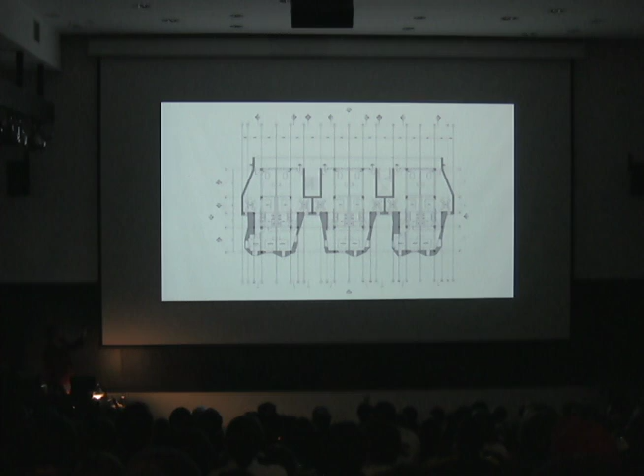What happens in this project is we rationalize this variation in a very particular way. So here in the plans you can see a typical floor level where 6 of these units vary. There's some 2-bedroom units, some 1-bedroom units. These are the kind of floor-by-floor variations. And we rationalize these plates now, the floor plates, where there are these super components, as we call them, very large-scale factory-built elements.

These are the components. You can see in the top and bottom, half components, the only variations in them. And when you assemble them all up, you get an effect like this in the drawing, which in the drawing was great. We then did renderings where it started to go very Flintstone in the sense of these deep punched openings through a solid, worse, and built a model to check. It was, yeah, bad.

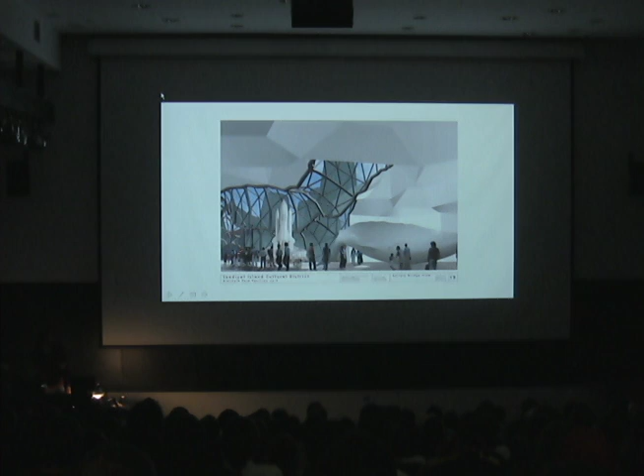And here you can see the way those solar chimneys work. So there are long glass-covered ramps that run along the water and are open on one side. So they'll pull some of the evaporatively cooled water off this walkway. And then these are the chimneys that'll get super hot, like 150, 180 degrees in the summertime. And these will suck all the cool air from the water through the building and up out the top of the building.

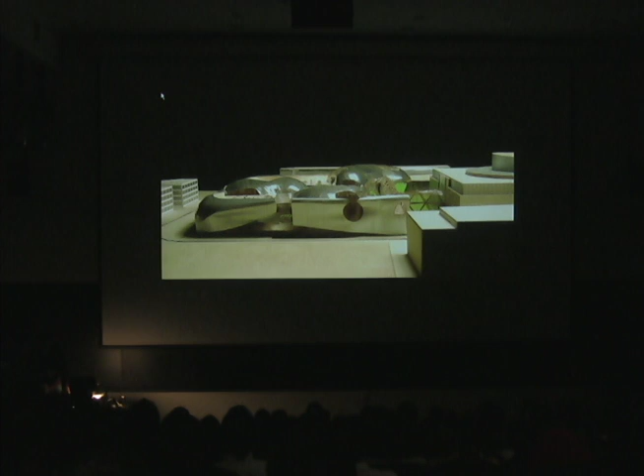And you can see also the transition from these facets, getting more and more faceted until they hit these oculi, and the multiple oculi in the gallery, a little bit like those Iranian bowls. And it's approached with a ramp up here and a ramp up there, and then an escalator down there and an escalator down over there. So everybody pools into 2 entries at each end of the bridge. And the landscape is pretty schematic right now, but takes on some of the form of massing. The BMW Design Center, which I'm not going to go into so much.

The approach of surfaces that I've been talking about so far has been about articulation and producing detail. I got forced into a marriage with Hedi Slimane from Christian Dior on a project for Visionaire, and Hedi Slimane is kind of the apex cool gray minimalist out there. And in this collaboration, I got interested in using surfaces for not maximal effects of articulation, but also minimal effects.

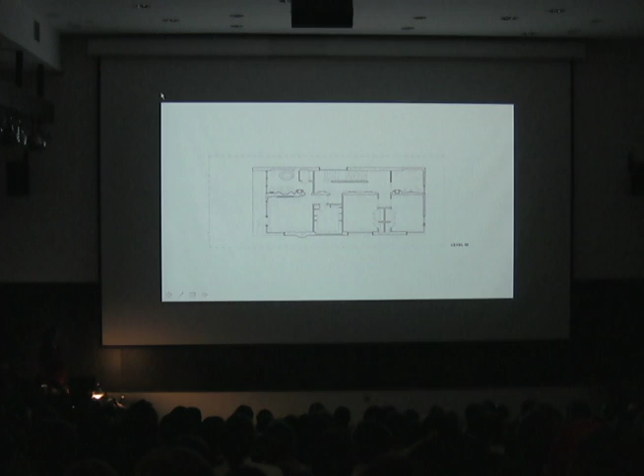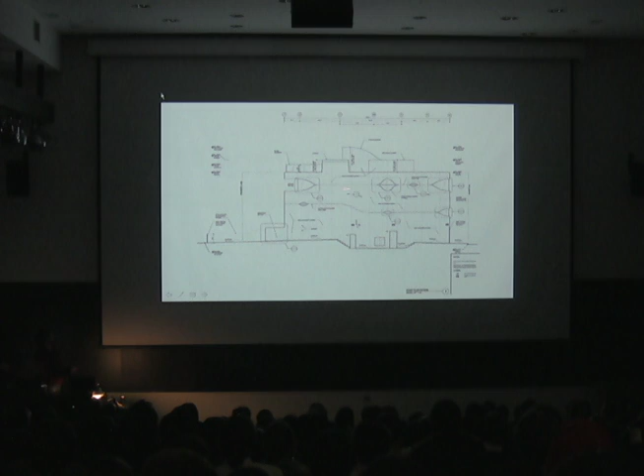Upstairs, all the bathroom vanity and sinks and cabinets and powder nooks also get sucked into a single surface. And a lot of this stuff uses plastic. I'll show you. The walls also have this stainless steel reglet that swallows up all the windows. So the windows kind of split out of this metal rail and pinch to disappear again.

The way the walls are made is with a kind of egg crate framing that's cut by a laser. This laser is 30 years old, so I could have been doing this 30 years ago. Like when I was 14 years old, I could have been building these funny shapes. Just for everybody that thinks the construction industry is so far behind and we're so far ahead as designers, it's absolutely the other way around.

So we cut all the components. Also, we took a look and we found out we wasted less wood by laser cutting our framing than we would have if we bought a bunch of sticks and cut them to length. So this kind of customization is also very efficient.

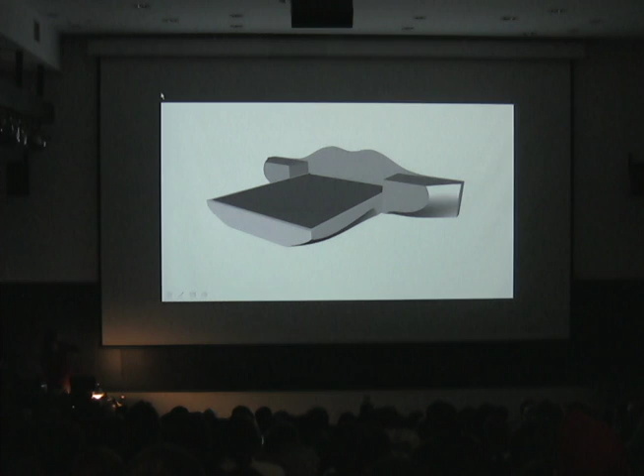Same thing with the bed, we're doing in bamboo. I don't have a picture of that yet, but upstairs it's all bamboo floors, and all the beds kind of mold out of the bamboo floors. The light, Kraken light, which is a 3D printed light that goes over the dining room table.

So all this plastic stuff, the Corian's plastic. The bamboo, even though we like to think it's kind of healthy bamboo, it's all plastic pretty much. So the luminous ceiling is all plastic. It's a very plastic house. The person who wants a plastic house more than anybody is my wife, Sylvia.

And I'm going to show you the design for our house, which I've been playing around with and not getting anywhere on. But certain things from it have come to fruition. And again, they're more plastics. So for the house, there are a few inspirations. One is this house by Lautner,

which cantilevers over a hill and in the center of this cantilever carves out a courtyard. And it's a really amazing house because you get this floating courtyard, and when you're in the house, you get an amazing view out from the hill, but you also get an amazing view down and out through your house down the hill. So this idea of punching courtyards through a suspended house was kind of the first place we started.

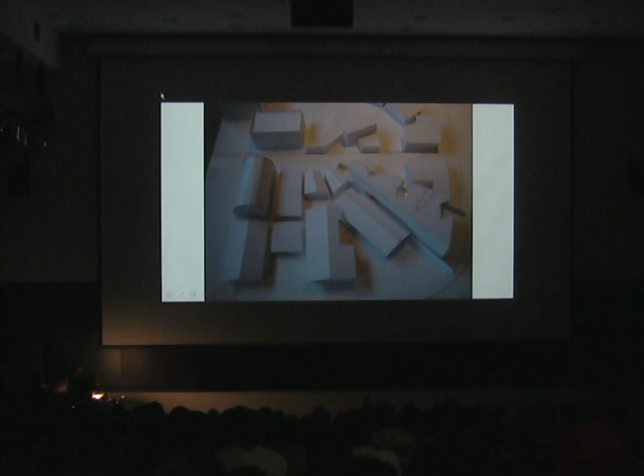You can see the lot is a pie-shaped lot, again with very limited zoning, but by lifting the whole house in the air. We also have to park 3 cars on this lot with an 8.5-foot dimension at one end of the site. So this whole thing under here is a parking lot, which, because we don't have that many cars, we live in. And light gets brought into that through these courtyards, which are punched through the volume of the house.

The second thing are these filleted columns of Wright's Johnson Wax, where the columns mold and disappear into the ceiling. You know, never noticed, but a lot like some of those courtyard things, or some of the things in the Bloom House.

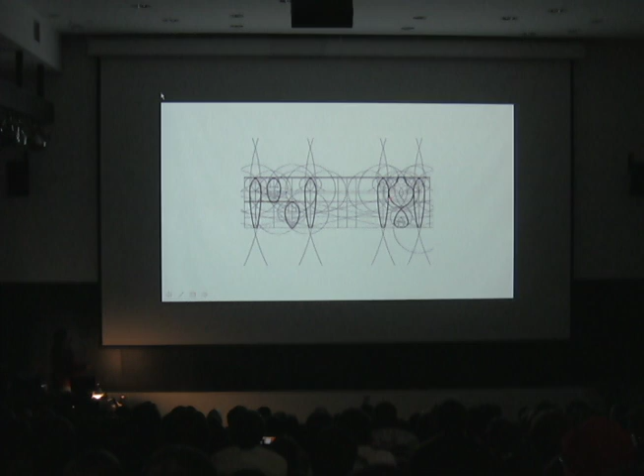And finally, the structural idea is that instead of having a truss built out of columns with a beam, the truss is a continuous rolled tube of steel that runs down the entire length of the house, and is expressed on the facade of the house and also on the roof of the house. So they won't be beams that are bent the hard way like this. They'll actually be tubes, like 8-inch tubes of varying thickness.

And we modeled these all with Gehry Technologies software, with CATIA. And even though it doesn't matter, I found, we made them all whole number radii, and they're all linked together. So if you move any one part, you can see it moves the whole section. And these are also set up so that they're offset by 8 inches so that they can be rigidly welded to each other to give you stiffness in the direction of the truss.

And I developed this truss with Klaus Bollinger, so-called the Bollinger truss. And you can see how this tube wraps around and offsets and weaves through itself to get its rigidity in plane.

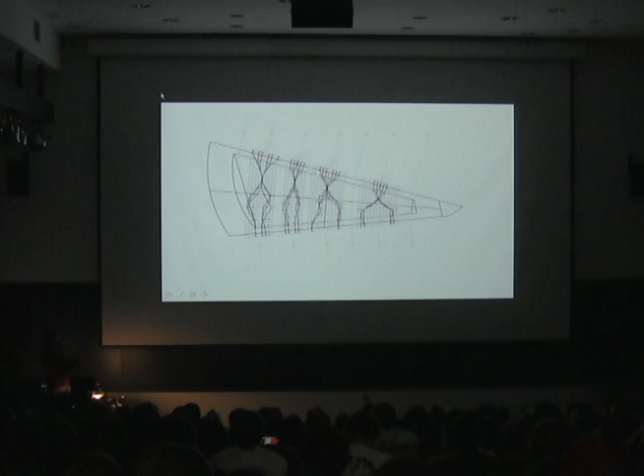For those dimensions. For the articulation of the interior of the house, I start with those loops and connect from the north side of the house to the south side of the house, from loop to loop. And that gives us these kind of courtyards that pinch where they fold through each other.

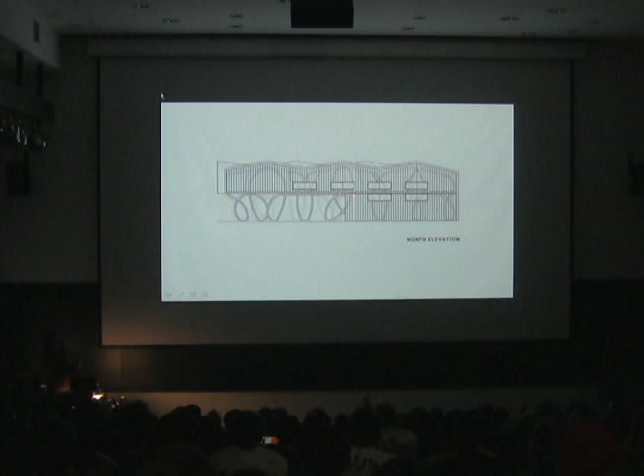The north side of the house, we use some kind of translucent curtain wall system. There's a channel glass here. And you'll see the truss looping through the house through the north facade. And then on the south facade, it's opaque, and you get these large light wells which bring light down into the courtyard below. In the summertime, it's kind of limited right here because it's set directly south. In the winter, it'll get a lot deeper into the courtyard.

What happened with the house is we've got kids. They're not so young anymore, but they're 7 and 9. And for a while, we had all these giant pieces of plastic, rotomolded plastic around the house, like rocking horses, sleds, things to tow behind the boat, playhouses, all single objects made in the rotomolded plastic machine,

which is you make a mold and you stick the mold in an oven and get it hot, and you pour plastic pellets, and the mold tumbles around and the plastic melts on the walls, and you pop it out. It's slow, it takes like 10 minutes a part, but very, very cheap for tooling. So they make kids' toys out of it, and it's UV stable, recyclable and recycled. Just seemed like a great building material.

So I said to Sylvia, why don't we take the kids' toys and start collecting toys, and I'll scan them, we'll compose them in the computer, I'll use the robot to cut the joints between them, and we'll glue them together, and we'll build all the interior walls out of recycled toys.

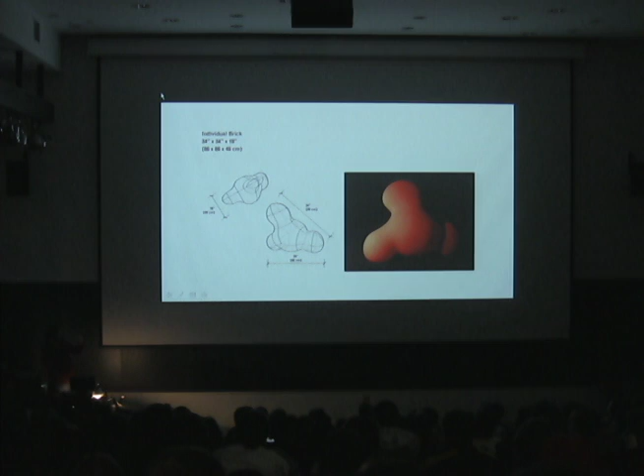It's a hollow plastic brick. You can see it's about 3 feet in a triangle, and it's made with 3 lobes. So one lobe can kind of nest in between the other 2, or you can rotate it and spin it to start to get really bumpy, rusticated facades, like in a Renaissance palazzo.

We take these bricks and array them in patterns across surfaces, and we find the points of intersection. So each brick will usually intersect between 4 other bricks, sometimes more. And we take this line and program a robot with that, and we put the brick on a jig, and the robot cuts away the part we don't want. We recycle that and assemble the bricks one on top of another.

So it's rethinking what a brick is, or rethinking what masonry is. So instead of a modular element that gets stacked with mortar, this is a very precise brick which interlocks with its neighbors. And instead of being a very heavy, fired masonry system, this is a lightweight, easily transportable system that's hollow. That's the robot. I can show you a video of the robot cutting up some of these things.

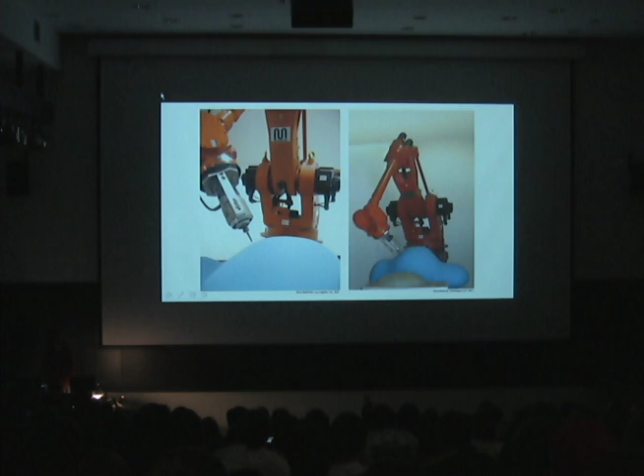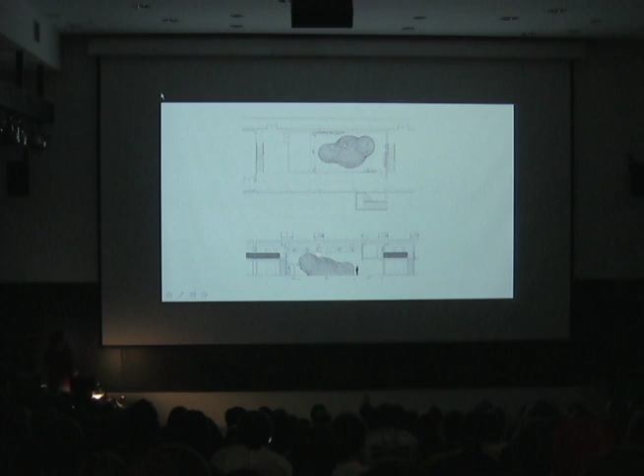And for the Biennale in Venice recently, we were going to send some blob wall systems, and actually decided that I would go back to the first idea of doing this with recycled toys. So we took toys from 5 different manufacturers, scanned them, the little dots are for the scanner,

scanned these things in the computer, built a surface mesh out of them, arrayed them in a pattern, put them on the robot, cut them up, it worked out. Poor alligator. And started to assemble them into furniture. So, shelf, table, side tables, bench table, that's in Venice.